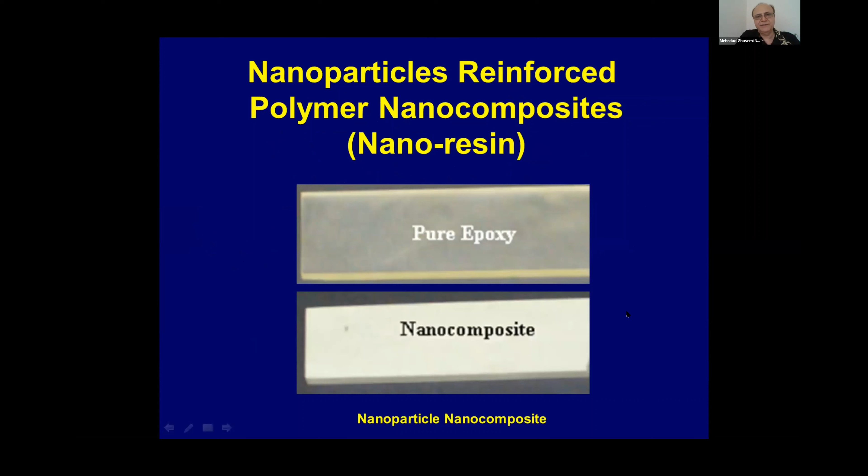So first, Nanoresin. Here we use nanoparticles inside the epoxy system to improve the properties. We also use CNTs, carbon nanotubes, and GNS, that is graphene nanosheets. We functionalize them and put them in the thermoset to improve the properties. Basically, with this inclusion of functionalized carbon nanotubes or graphene, at less than 1% inclusion, that's the advantage of our patented technology. It's a small amount of nanomaterials you put, albeit functionalized, and you get

large property improvement. For example, here you see viscosity doesn't change. You need that for processing. Glass transition doesn't change. Modulus doesn't change much. But the strain to failure increases by 100%. Toughness increases by 200%. Damping increases by 300%.

So in the landmark publication we had in Advanced Functional Materials, we showed that with a very small amount, like up to 0.4% functionalized graphene, we can improve the fracture toughness by about twice of what exists without it.

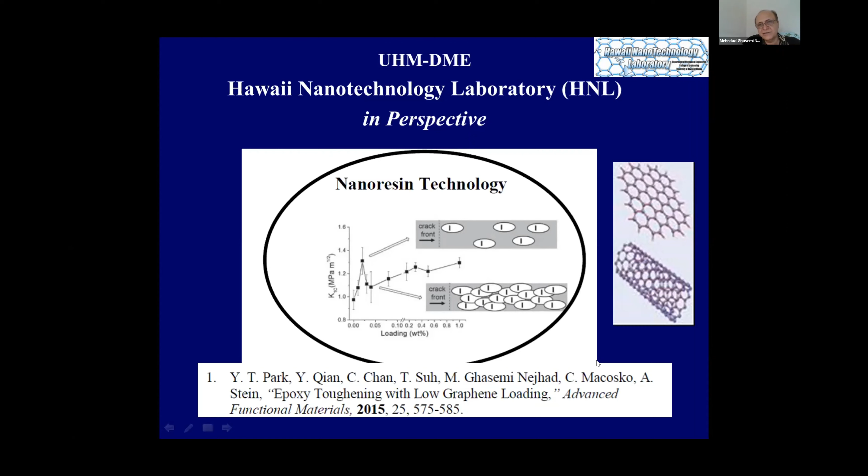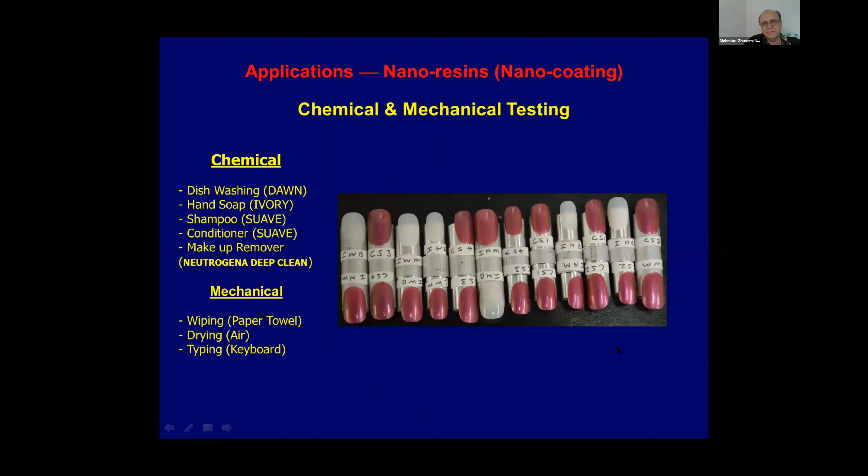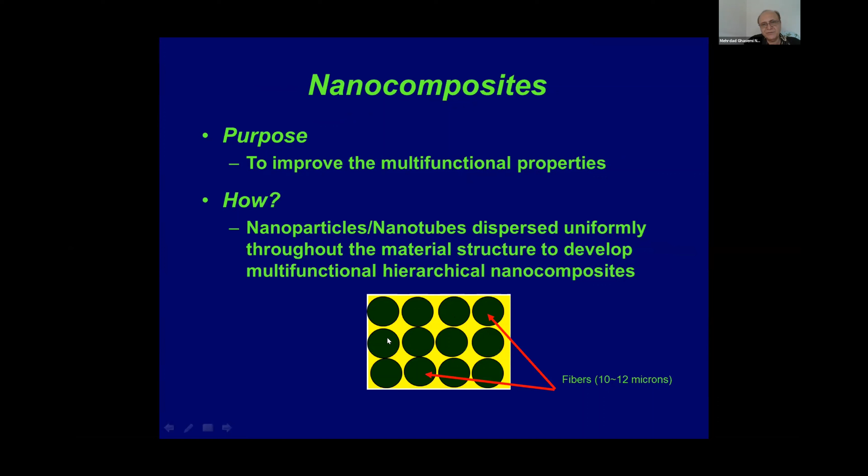So application of nanoresin is basically anywhere you use composite materials. We also use it in nail polish to get improvement in performance. You can use this nanoresin technology also in ceramics. So pre-ceramic polymer you can use with continuous fiber. We call it CFCC, continuous fiber ceramic composites. This yellow represents pre-ceramic polymer, black represents fibers. So this is CFCC without nanoparticles, but we can put nanoparticles in it and improve the property.

We showed that certain nanoparticles perform the best, for example, yttrium oxide. And then we picked that and increased it from 10%, 15% to 20%. And we showed that as you increase the percentage of nanoparticles, they agglomerate and behave like a microparticle. They no longer improve the property. For example, at 20%, you see here all the properties drop, whereas at 5%, the property improves both in the plain infiltration and the solid infiltration.

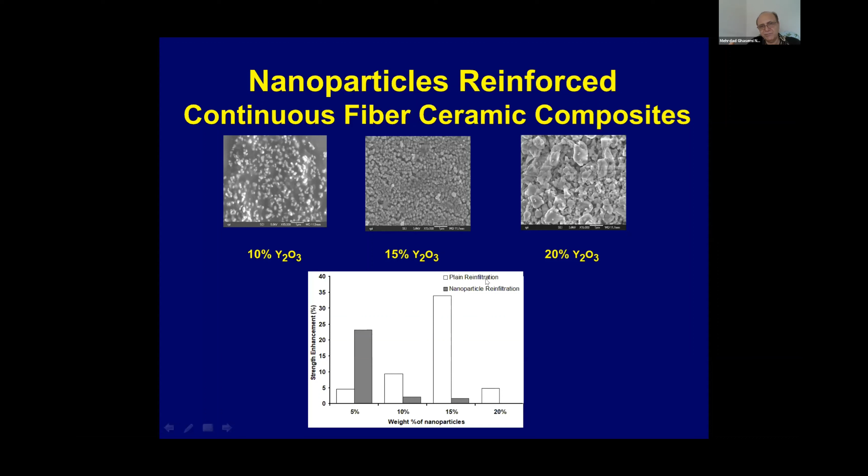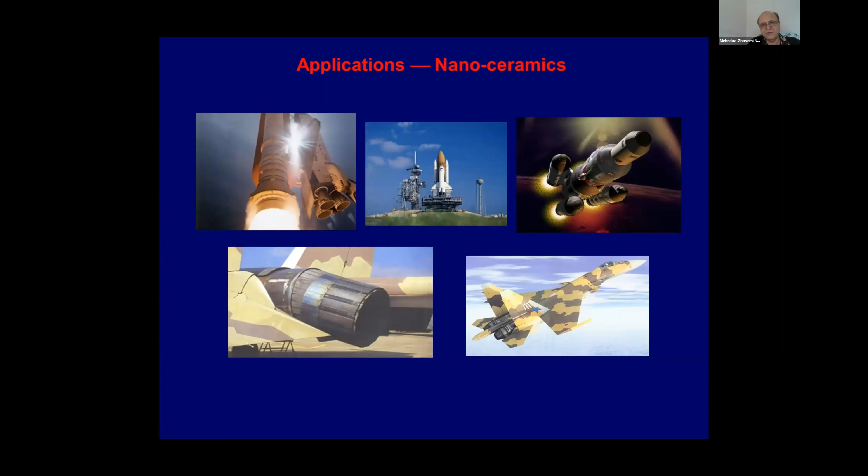But as you increase the percentage, it's better to only start with 15% nanoparticles the first time, and then subsequent infiltrations should be plain infiltration to get up to 35% strength enhancement for ceramic nanocomposites. So these are high temperature structural applications for nanoceramics.

So the next technology is Nanoforest. Nanoforest is where we grow carbon nanotubes on the surface of the fabric. The problem is that if you don't have anything in between the layers, you just have matrix there. You don't have fibers. So we grew carbon nanotubes in between so that we prevent or delay crack initiation and crack growth.

People have been working with knitting, stitching, and also braiding to solve that problem, but these have associated problems. For example, knitting increases the through-the-thickness property by 20%, but drops the in-plane property by around 15%. So you give some, you take some.

In this case, also for braiding, you see the fibers are not orthogonal, whereas normally a designer uses orthogonal fibers. And also, if you use thicker laminate, you still have to put a number of these together. You get an interlaminar issue, which is resin rich.

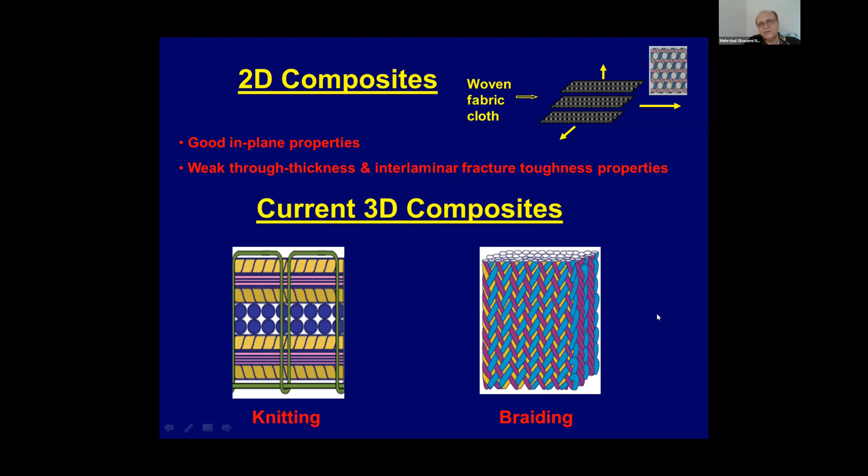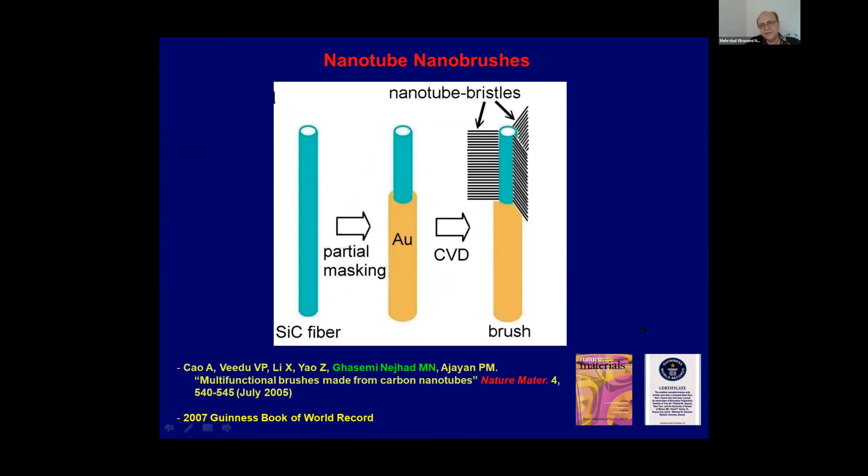In doing so, we first grew carbon nanotubes on the surface of the fiber, and this way we created the world's smallest multifunctional brush. We published in Nature Materials in 2005, and then we received the Guinness Book of World Records for the creation of the world's smallest multifunctional nano brush. So we have control over the growth of the nano brush. You see, we have a different variety of nano brushes.

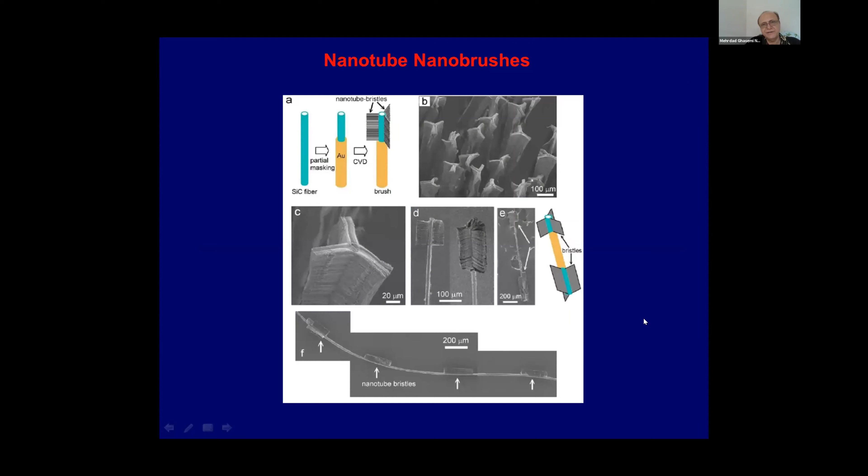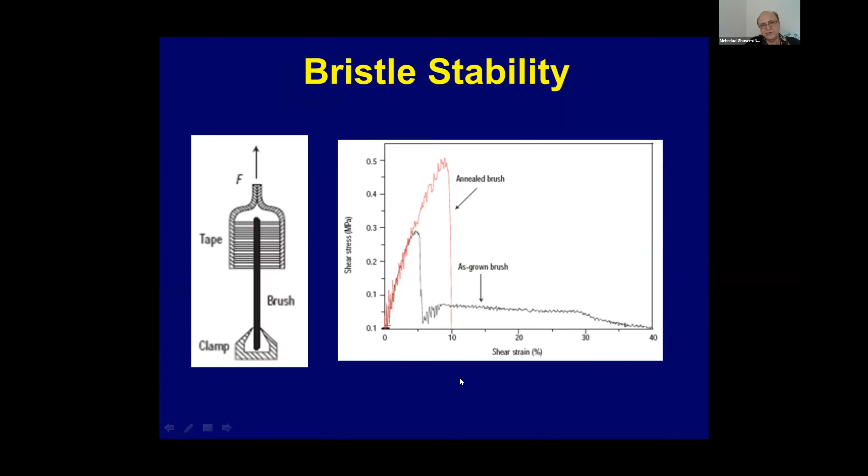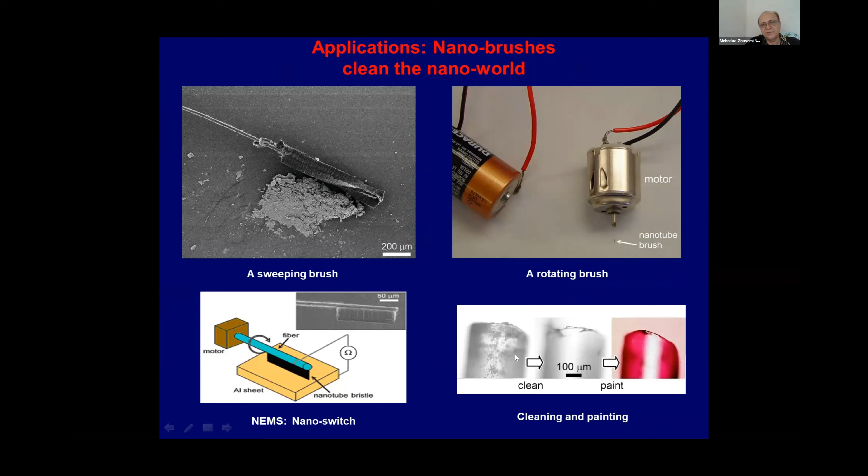We can even improve the adhesion of the nanotube to the stem of the brush by annealing, so double the shear strength of attachment of the carbon nanotube to the stem of the brush. So there are many applications: nano cleaning, micromotor, nanomotor, electronic switch, and then cleaning inside microcapillaries, that's a medical application.

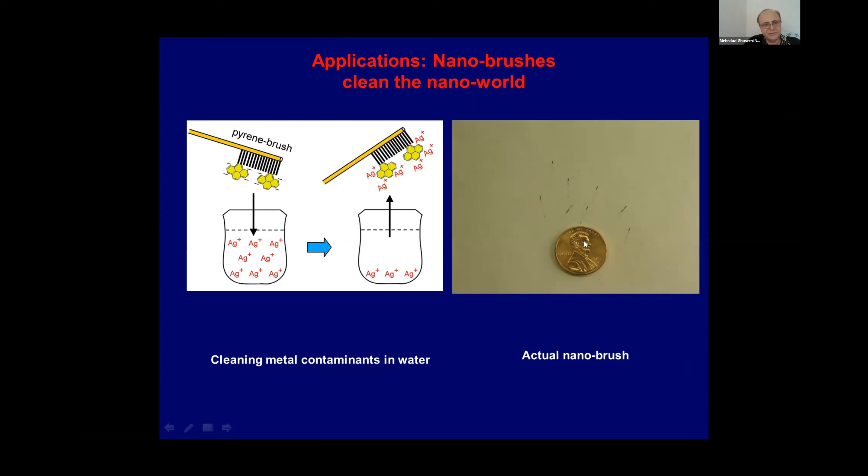Also, you can functionalize the brush with, say, a pyrene system, and that will attract harmful materials, ions in the industrial waste water, like mercury and silver and cadmium. This is the size of the nano brush compared to a penny. So those are small, our carbon nanotubes, this is the stem of it.

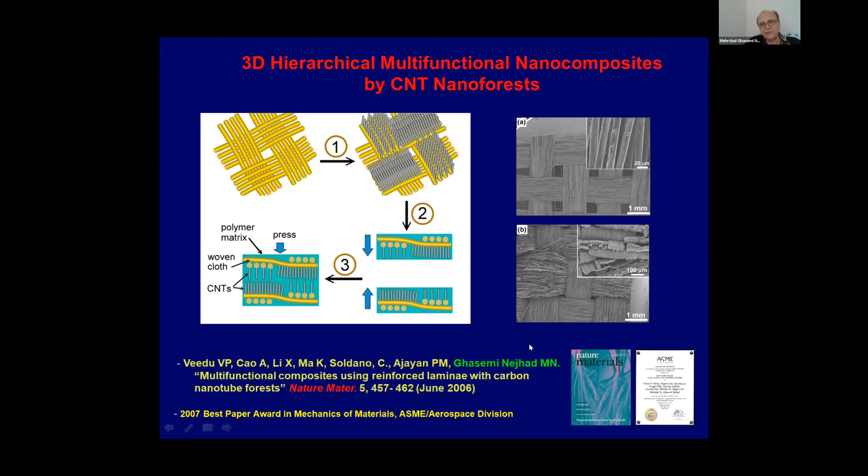So we go back to Nanoforest. We published this in Nature Materials in 2006 and won the Best Paper Award in the ASME Aerospace Division in application of materials mechanics. So here, as received fabric, here we have Nanoforest on it. This is as received, this is Nanoforest. Even after fracture, carbon nanotubes are attached.

So we improve the property in many different areas like fracture toughness, mode 1, mode 2, damping, coefficient of thermal expansion, thermal conductivity, electrical conductivity, in-plane modulus, strength and toughness. You see all of them improve like 4 times, 6 times in different areas. For example, fracture toughness improves 4.5 times, damping 6 times, thermal conductivity is 1.5, and then huge electrical conductivity.

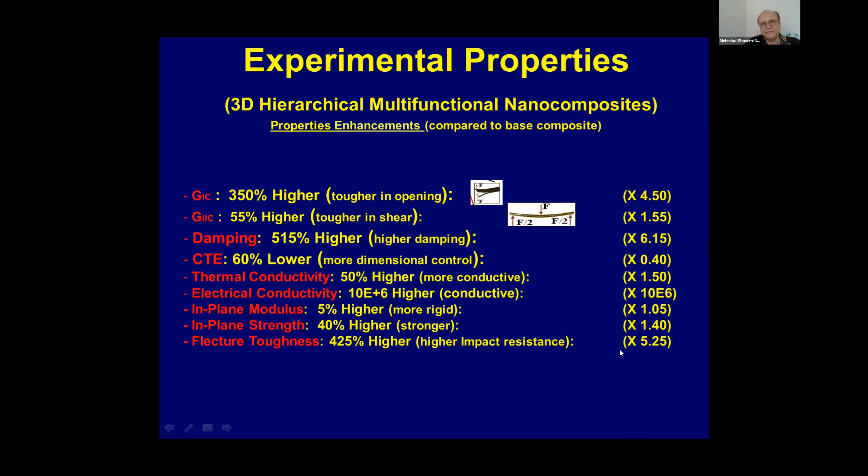Huge electrical conductivity because through the thickness, epoxy is not conductive. We put in carbon nanotubes, it becomes conductive. Again, modulus, flexure modulus, the strength and also flexure toughness improve. So we applied that also to ceramics. In ceramics, we get 40% improvement in flexure strength and 110% improvement in toughness for a ceramic composite.

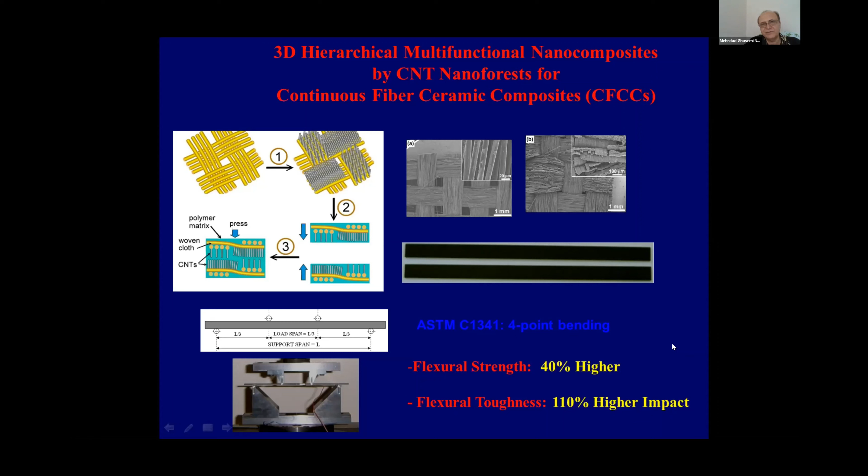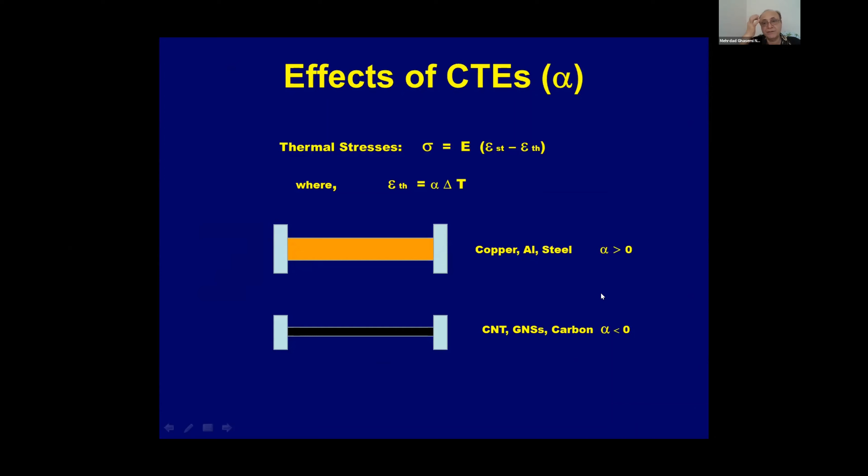These are ceramics. So as I mentioned, 40% improvement in flexure and 110% improvement in toughness. Also, they have close to zero coefficient of thermal expansion, which has application in space. So I showed, for example, regular materials, copper, aluminum, steel, they have positive coefficient of thermal expansion; CNT, GNS, they have negative coefficient of thermal expansion.

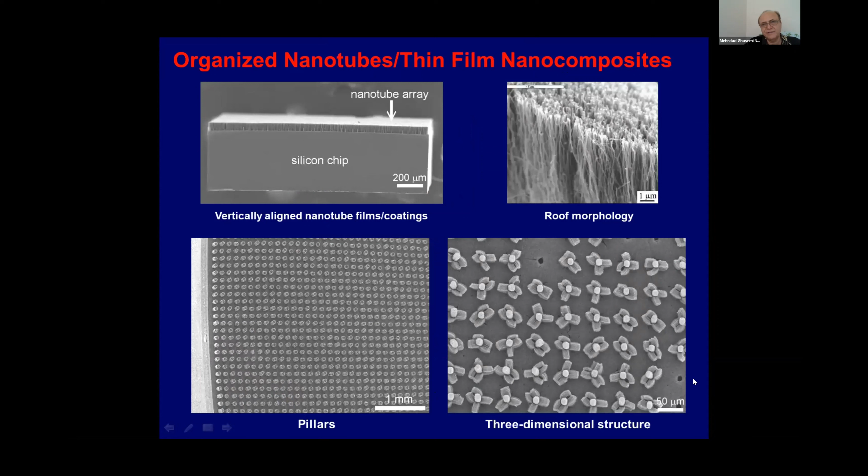We also created Nanoforest on the substrate, removed it and interleaved it in composites. We call it Nanoforest 2. This we published in Science in 2005, and that showed other applications. So this is Nanobrush, Nanoforest, we call it Nanoforest 1. This is Nanoforest 2, we created and then removed it and interleaved it in composite. So these are applications of Nanoforest. Anywhere you use composite, you can basically use this.

Application in energy is in wind turbine blades. Normally wind turbines have power related to R squared. This is the circle created by the blade turning, but the weight is R cubed. So as you increase the length of the blade to get more power, weight increases.

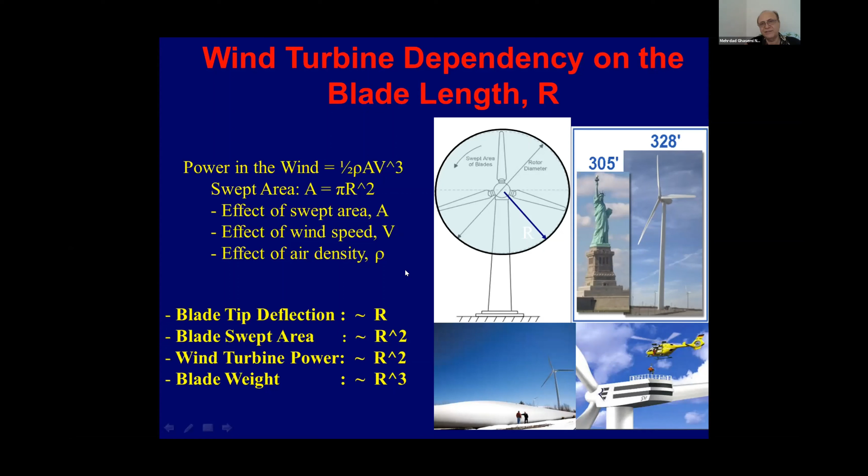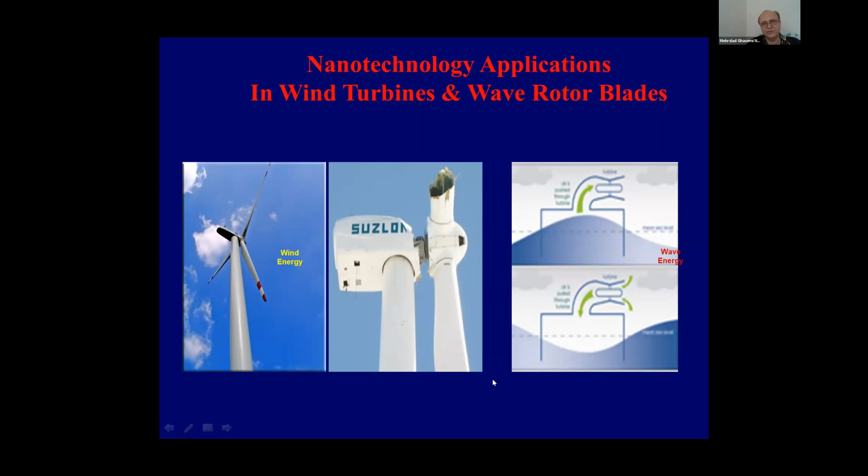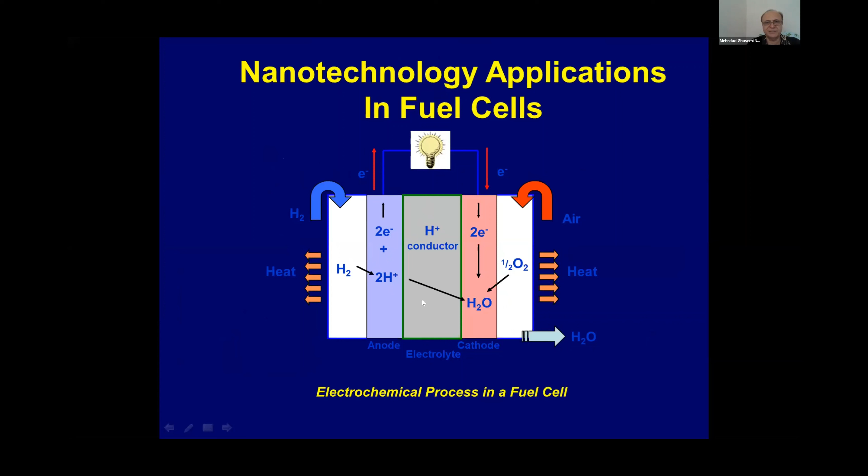Also, there is application to fuel cells. In a fuel cell, you have Nafion, the proton exchange membrane, here. Then you have a catalyst layer, this green, and then these two parts are the gas diffusion layer. So we showed that we can improve the performance of the catalyst layer by using Nanoresin technology. We put platinum nanoparticles on a bed of carbon nanotubes.

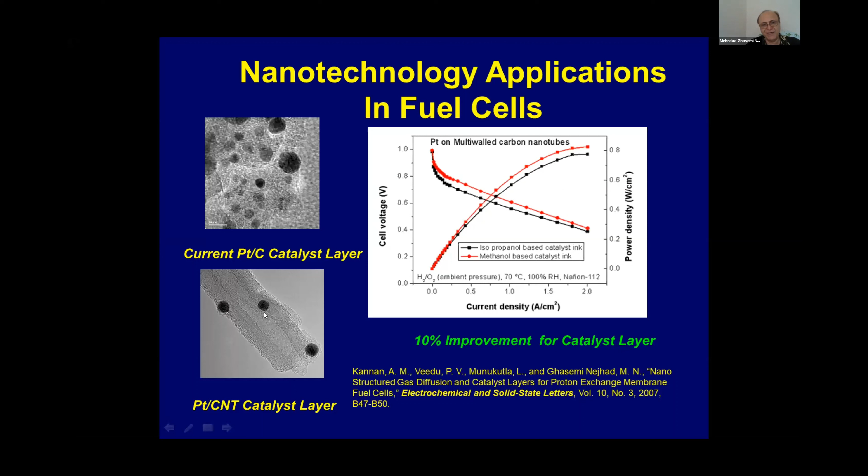Other researchers had 40% saving in nanoparticles, but performance was the same as without. We use less platinum. So we had 60% saving in platinum, but we have 10% improvement.

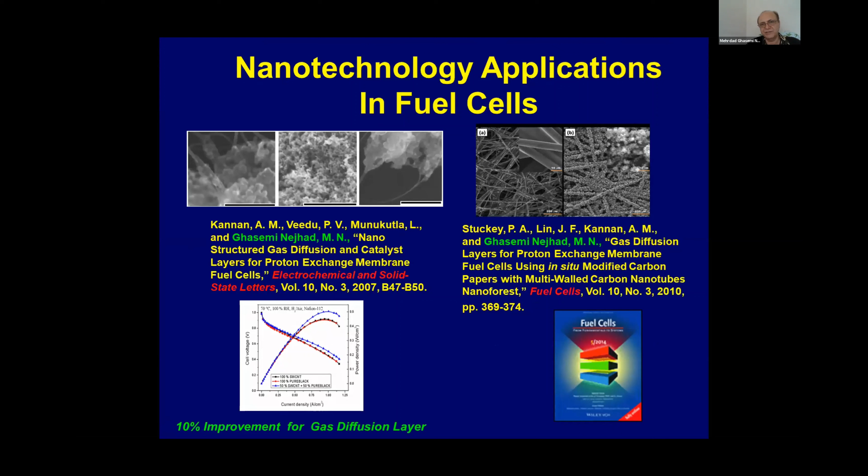Also, we use Nanoforest technology for the gas diffusion layer, and we got, again, 10% improvement in performance of the fuel cell, while saving on the moisture production, etc., because carbon nanotubes are hydrophobic and they repel the moisture. So that's the improvement of the fuel cell.

Also, you can use nanomaterials in batteries, supercapacitors. The main idea is that on the cathode side, when you store the ion, when you charge it, if you have larger surface, you can store more ions, and that way you increase the capacity of the batteries and supercapacitors. Now, carbon nanotube and graphene have a much larger surface to volume ratio, so they have potential to increase the battery energy density and so on.

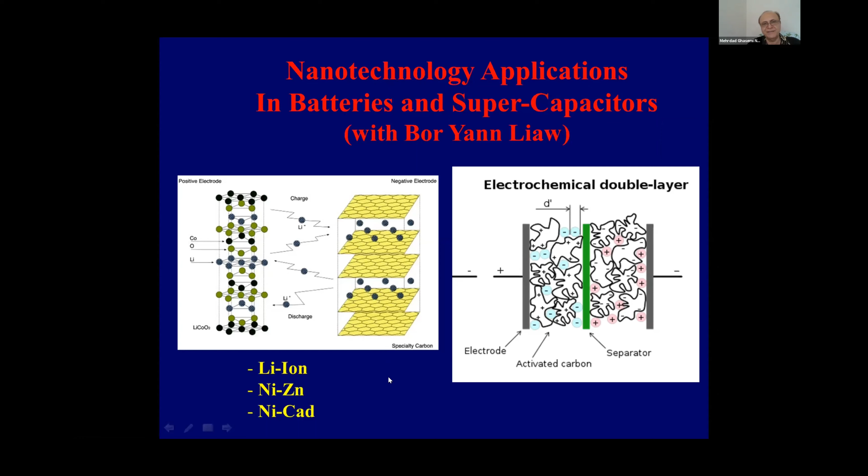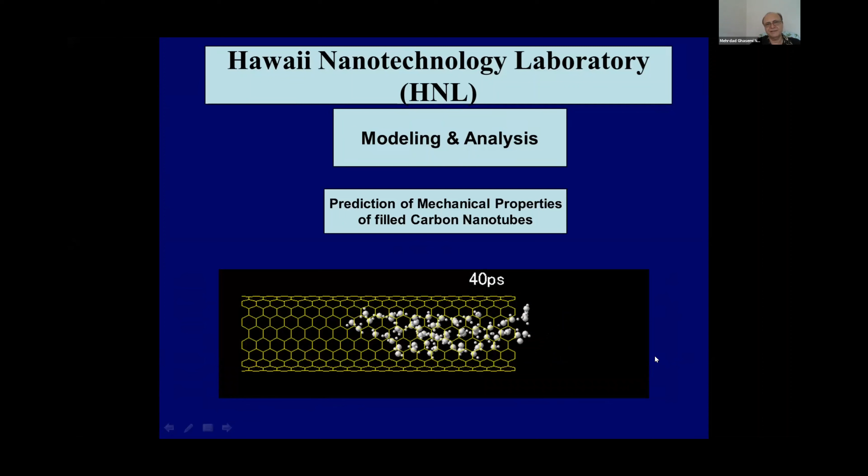We also did some modeling. I want to go through it, but I'm running out of time. So I'll just quickly show you: we did modeling for the effective coefficient of thermal expansion, and also thermal conductivity, electrical conductivity for both carbon nanotube and graphene. Basic fundamental modeling for carbon nanotube and also for graphene. This is that modeling.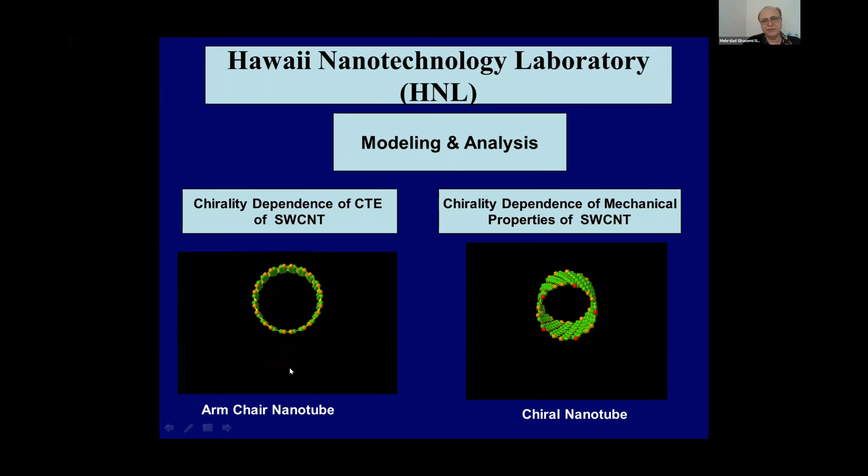So I said we had a paper on chirality dependence of CTE, coefficient of thermal expansion, for single wall carbon nanotube, and also chirality dependence of mechanical properties. Here we show different organizations of the carbon nanotube, armchair, here chiral. So those are the two papers that I mentioned, and also some applications.

We modeled the effective modulus of the single wall carbon nanotube using asymptotic homogenization. This is an analytical solution. And then we compared that with finite element analysis for different chiralities, and the result was very close. In analytical, we get 1 terapascal for modulus, which is this line.

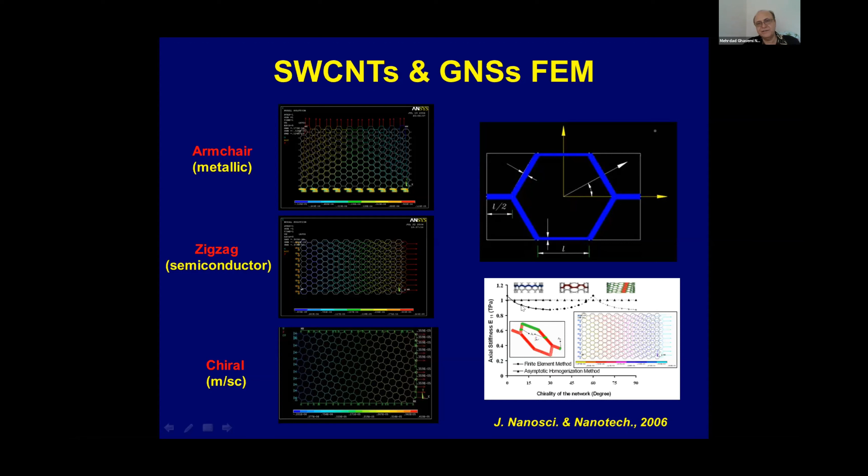But in the finite element, it depends on chirality. When you are pulling closer to zigzag, you get slightly higher, and then you come to armchair, and then it repeats because it's 30 degrees repeatability. See, this is hexagonal, so every 30 degrees it is periodic. So it goes zigzag, armchair, zigzag, but it oscillates around that 1 terapascal. So we had a very close result between the analytical solution and finite element.

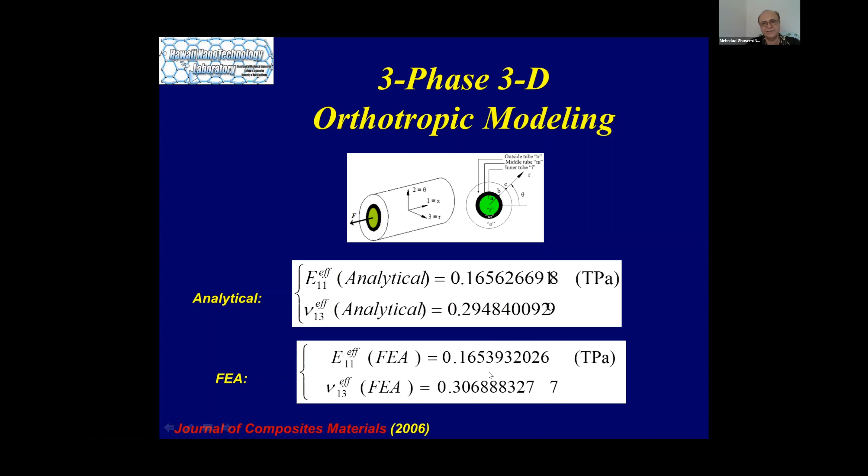Here again, we modeled it as a combined system. Here the black is a single wall carbon nanotube. You fill it with matrix inside and outside. So we had an analytical solution to find the effective properties, modulus and Poisson's ratio, and also finite element, and the results were very close, as you can see here. So here I have the list of publications for the different papers that I mentioned to you.

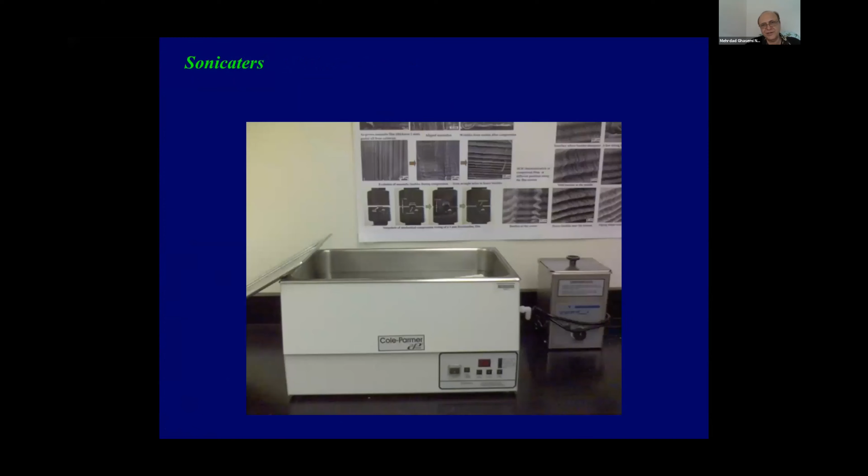I'm running out of time. I'll just quickly flash the facilities we have. This is a precision weight measurement, magnetic stirrer, sonicator for dispersion of nanomaterials, spin coater, chemical vapor deposition furnaces. This is a small one we have. This is a larger one we

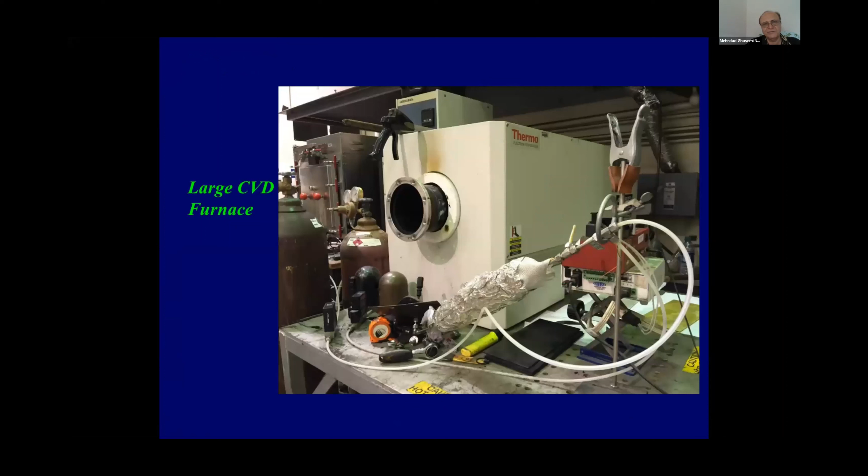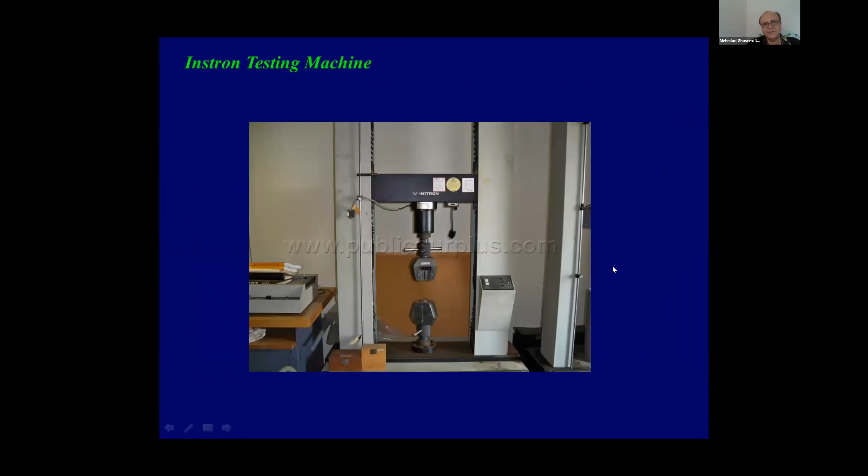fabricated in-house. This is a hot press. This is an autoclave. This is a high temperature furnace for ceramic processing, and then we do testing with the Instron machine. And we have others, like a glove box and dual mixer, etc.

I've worked on many conferences. I just want to mention one, I don't want to take much time, and that is: I worked with some of my colleagues to have the first Multifunctional Nanocomposites International Conference, hosted by ASME in Honolulu in 2006, and after that they repeated it many times.

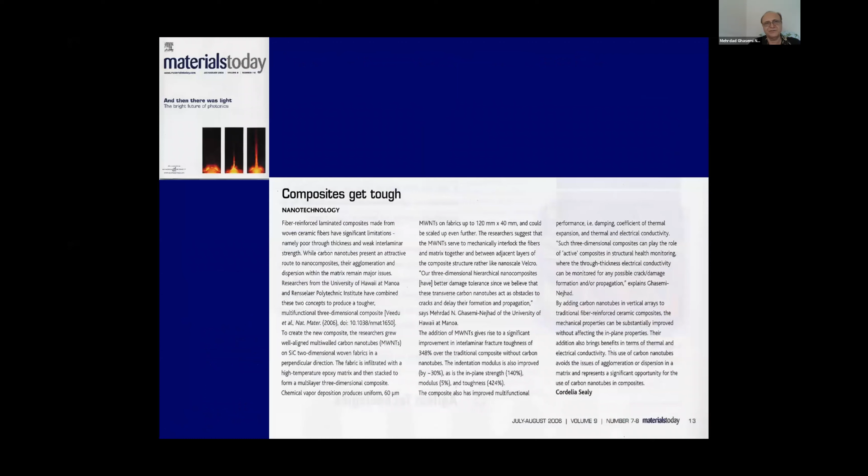Okay, we also received recognition for the Nanobush and Nanoforest work we did, from BBC, National Geographic, ABC, MSNBC, CBS, USA Today, Fox News, Las Vegas. This is local news, Washington News, and this is local news, Hawaii, China Daily, India Daily, and others. And those are for Nanobush, for Nanoforest, also Materials Today, Nanotechnology, Science Daily, AZoNano, AZoM Materials.

So here I show many other applications of the different technologies we had that I showed during my presentation. I leave you with Arthur Clarke's statement: any sufficiently advanced technology...